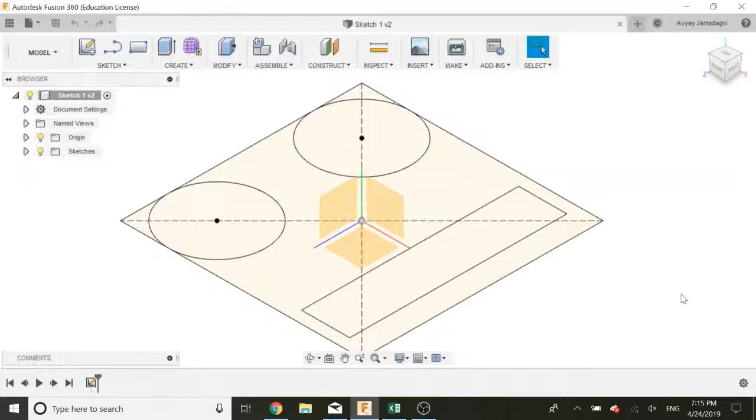So what is extruding? Extruding is basically a fancy term for taking a 2D sketch, or a face, and making it 3D. That's exactly what we're going to be doing with our sketch that we created in lesson 3.

Now let's zoom out a little and pan so this comes to the center of our screen. The first thing I want to do is get rid of this origin because it kind of obstructs our view a little. It doesn't matter too much, and if you want, you could keep it, but I prefer not to have it.

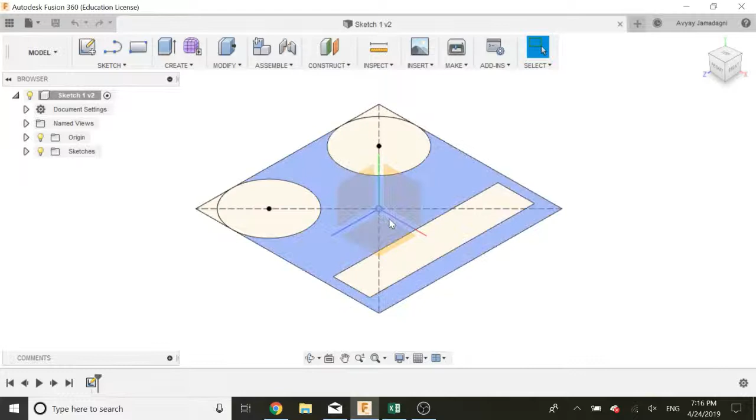To remove this origin, or just to hide it, you need to manipulate this tiny little light bulb over here. Just click on the bulb and that turns it off. So the origin is gone.

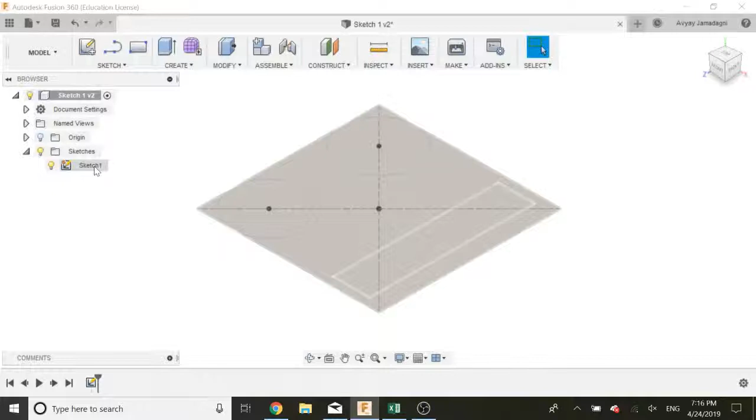Now the same thing you can do with your sketches. This is the first sketch we've created. To confirm this, you can see one sketch down in our design history. If you click on this tiny arrow, you see there's sketch 1. If I click on this, it highlights this entire thing, and that shows that yes, we have one sketch. Let's click on this again.

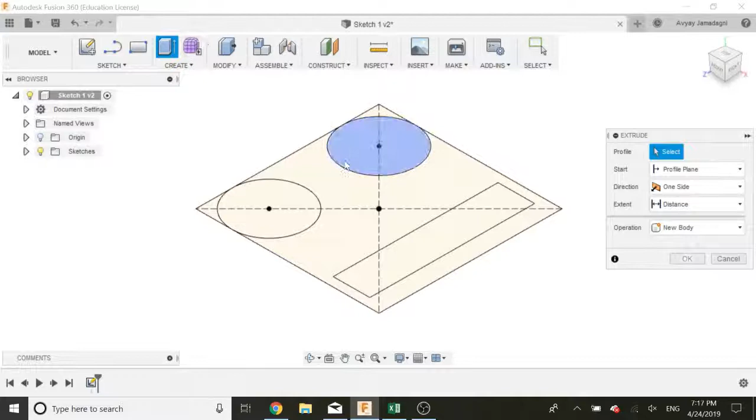Now we will be turning this sketch on and off throughout this video. First, I want to extrude this entire thing 10 centimeters upwards and 10 centimeters downwards. To do this, I'm going to click extrude, either by hitting create and then clicking on extrude, or I could hit E on my keyboard, as you learned last time, as it's the keyboard shortcut for the extrude option. Now I get this pop-up window.

Since I need 10 centimeters both upwards and downwards, I'm going to choose something called the symmetric option. So we'll go to direction, click on this drop-down arrow, and let's choose symmetric.

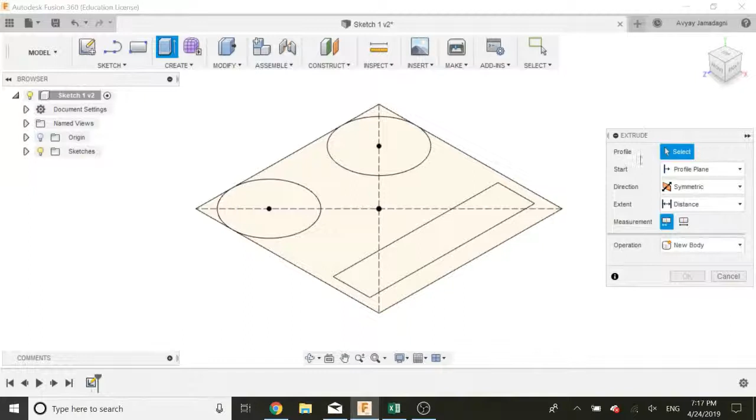Now it says extent is distance, and I still need to select the profile. The profile is basically what you want to extrude. To do that, let's zoom out a little. Instead of selecting each of these shapes individually, I'll select them using a box. I can just drag out a box over the entire thing, and that selects all the shapes.

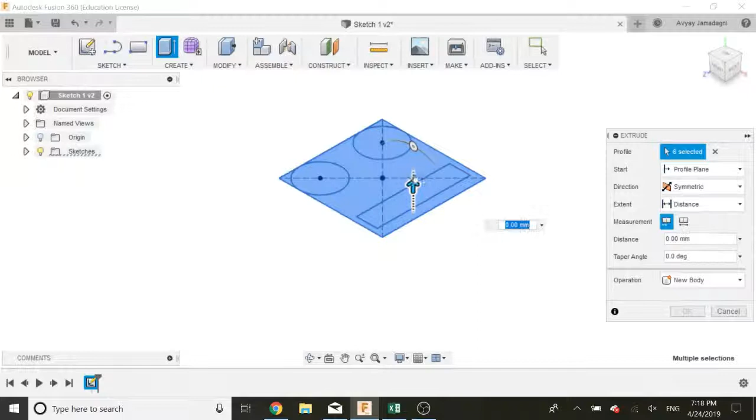You can see I can manipulate this by using this arrow, and however much I move it upwards, it moves the same distance downwards, which is exactly what I want.

So let's change this. Some tips on extruding first: you might want to move the arrow up and down just to make sure you know which way you're extruding, because you can extrude upwards or downwards depending on the arrow. If you're extruding in the opposite direction of the arrow, you need to put in negative numbers.

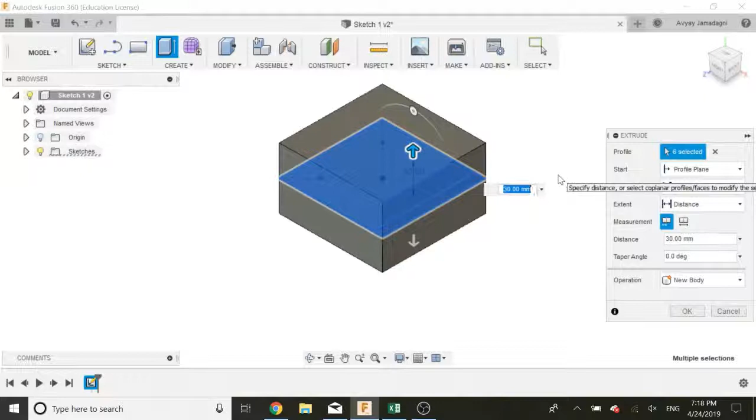But since we need to go in the direction of the arrow here, let's put in a positive number — we want 10 centimeters. Let's type in 10 centimeters and hit enter, and that's what's going to happen. So you see that now we basically have a cuboid.

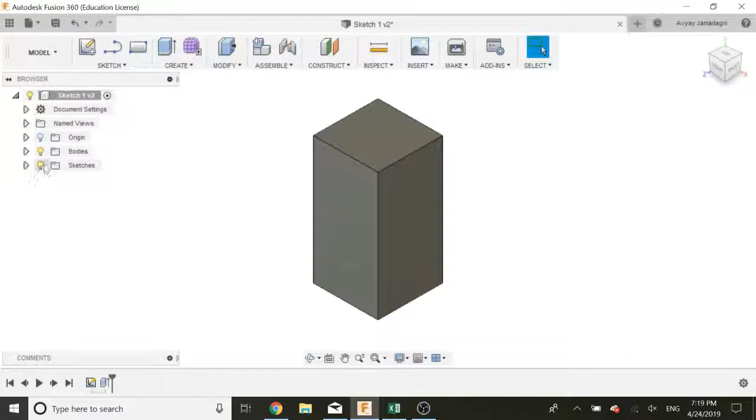Now, something Fusion 360 does that's kind of annoying: whenever you use a sketch to extrude, it automatically hides it. So let's try to show that sketch again — we click on this arrow and then click on this light bulb, and that brings back the sketch. Let's close this sketch bar by clicking on the arrow again. Now let's try to manipulate these and see what we can do.

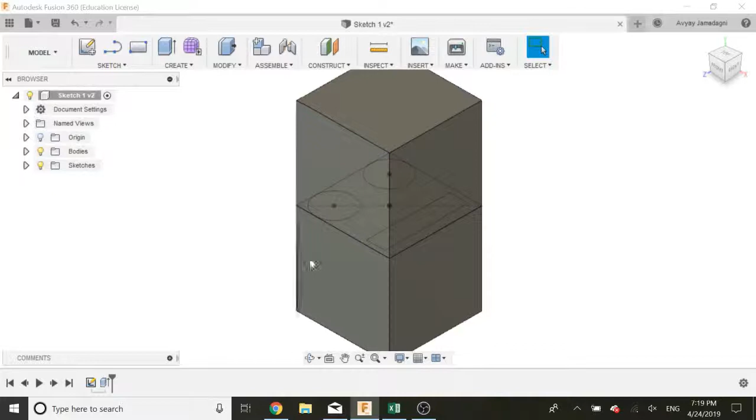First we need to create a hole on this area using this circle over here. To do that, we need to select this circle, but we can't do it with this body in the middle. So we're going to hide this body by clicking on this light bulb, and then we'll select the circle, hit extrude.

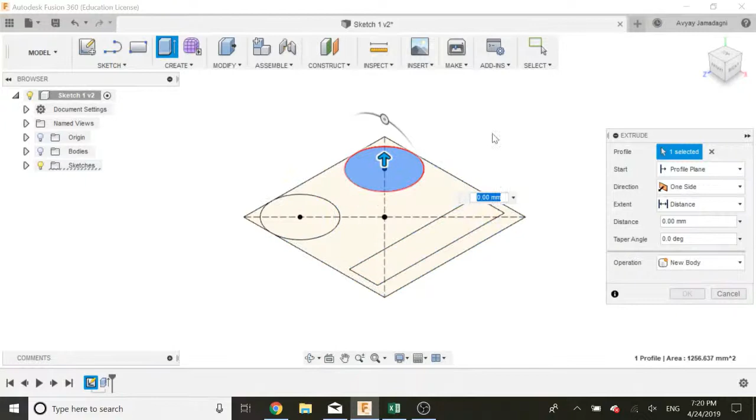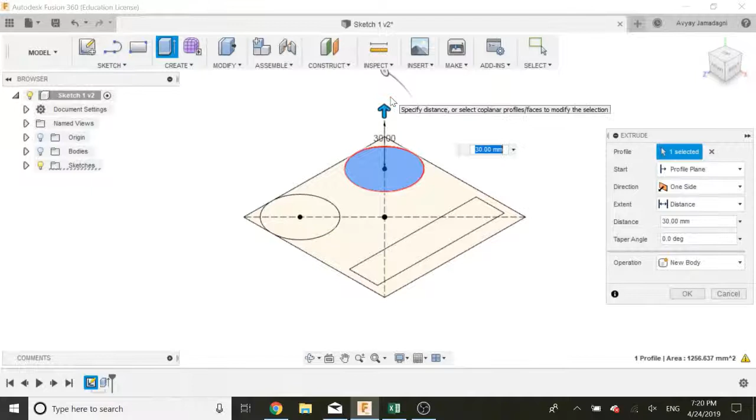It doesn't matter whether you hit extrude first and then select the circle, or select the circle and then hit extrude. Let's test out which way this goes. We're trying to extrude something, but we can't see it, as shown by the warning here: the object you are creating is not visible, please toggle visibility in the browser. Basically this means that although we're extruding something, there's a solid body around it, so whatever we extrude won't be visible. Let's unhide the body again and see the result.

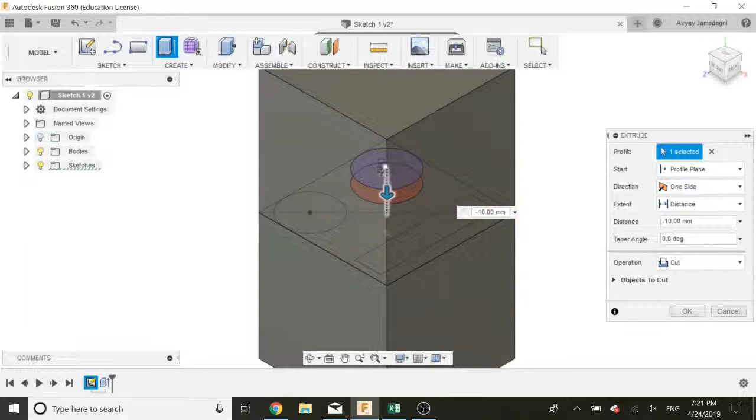Now you can see that we're extruding inside. But we're also doing one more thing: whenever you see this red shade where you're extruding, that object is being cut, so you're literally making a hole inside the cuboid right now. What we want to do is create a hole that goes throughout the entire cuboid. To do that, let's go to direction and click on symmetric, and test out which way it's going. That's good.

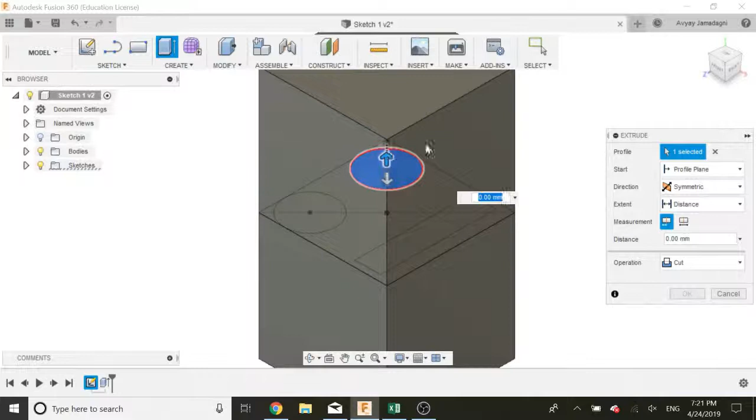We could type in 10 centimeters here, which will create a hole that goes directly to the top, creating a hole throughout the entire cuboid. But an easier and more professional way of doing it is, instead of selecting extent distance, we select to object. Usually with the symmetry option, to object is invisible.

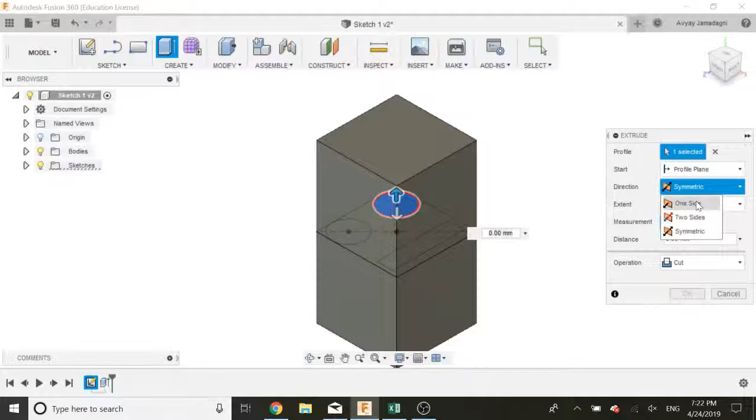So let's go back to the one side option in direction, and now let's go to extent and select to object. This selection icon is now present here, so let's go ahead and select this top face. Now you can see it creates a hole all the way to the top. However, it does not create a hole all the way to the bottom, and that doesn't make sense for us.

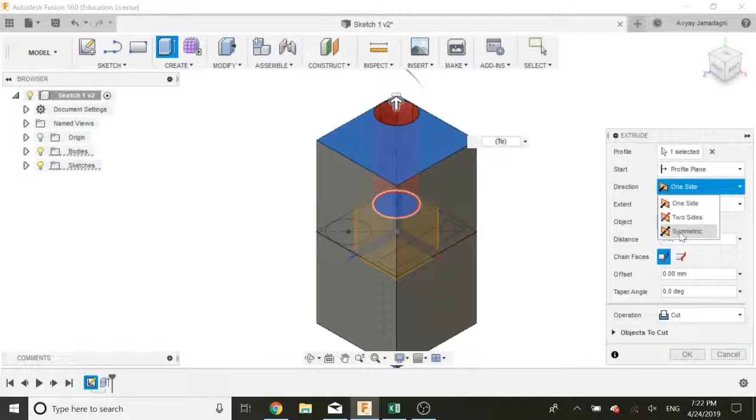So what we're going to do is go to direction and select symmetrical. Now you see there's a huge hole that goes all the way through the cuboid. Let's make sure the operation is cut, make sure this is shaded red, and go ahead and press OK.

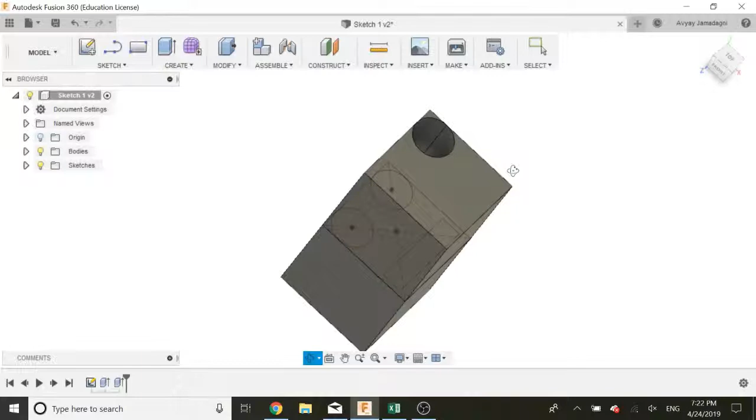Let that compute, and now you see there is a hole all the way through this. The advantage of using to object instead of direction and typing in 10 centimeters is that now if I manipulate this, or go back in my design history and manipulate the first extrude we did, whatever I do to it, whether I make it smaller or bigger, this hole will always be present. Sometimes if I mention only 10 centimeters and decide to extend this further up, the hole here will stay at 10 centimeters, and the hole throughout the entire cuboid will not remain.

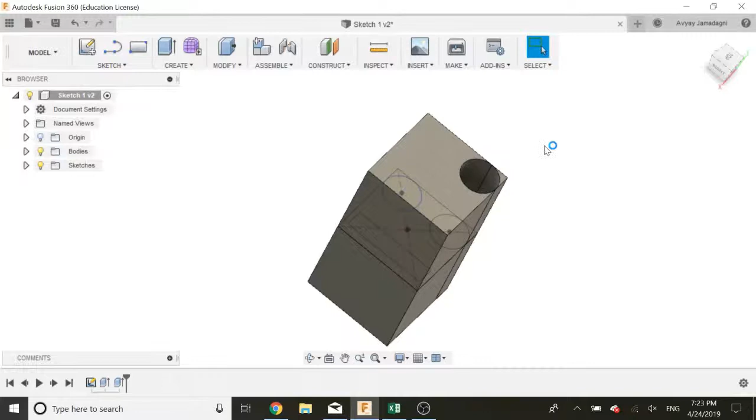Now let's go ahead and make one more small hole using this circle this time. Since we can't select the circle as it is, let's hide the body, select the circle, and then click on extrude. Now let's unhide the body again.

This time let's use a different feature. In the direction, instead of giving one side, let's give two sides, and let's manipulate this. You know the blue arrow is going upwards and the white arrow is moving downwards - that's side 1 and side 2. The blue arrow is the one you select, and this tends to move upwards, so that's manipulating side 1.

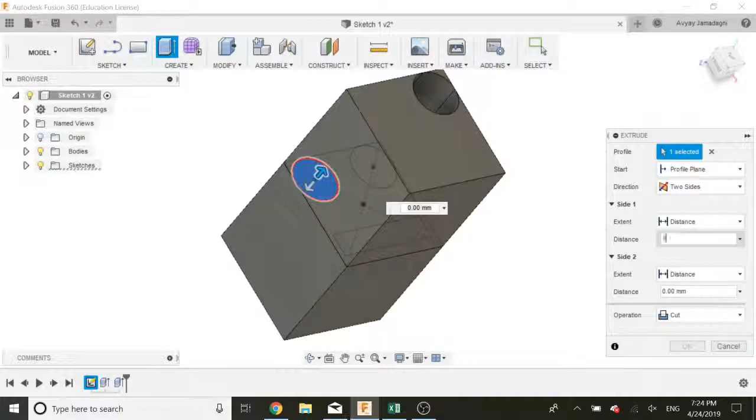We want the distance for side 1 to be 10 centimeters, or just to be a hole on the top. There are two ways to do this: either select that and type in 10 centimeters, or click on the top face and that'll automatically bring it to 10 centimeters. However, this is not the same as doing it by to object - if you extend this further, this hole won't exist anymore, so you need to be careful with that.

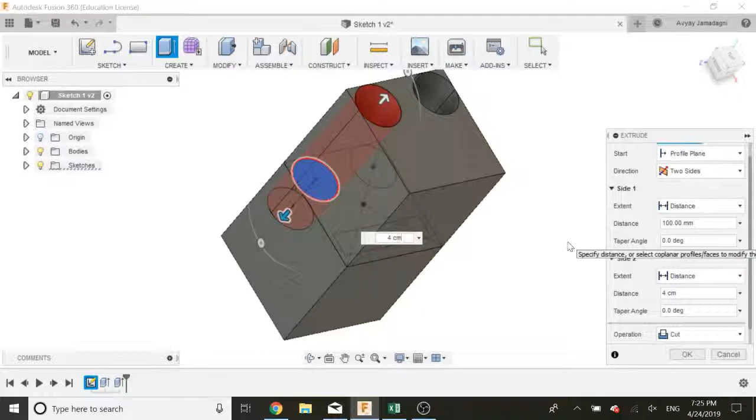Now for side 2, we want it to go down 4 centimeters. However, since the direction is already downwards, we don't need to put that negative sign. So we'll just type in 40 millimeters, or 4 centimeters, and that creates the hole on the bottom here. Let's go ahead and click enter.

Now you see, if you orbit around, there is a hole all the way down there, so that the total distance, the depth of that hole is 14 centimeters.

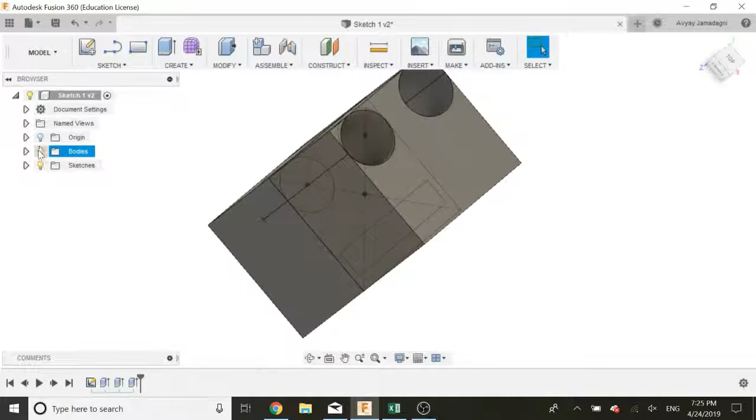And now one last extrude we want to do. For that, let's go ahead and hide the body again, and let's manipulate this rectangle over here. So let's select the rectangle, go to extrude, and let's unhide the body.

Now, what we want to do is extrude this upwards 12 centimeters. So let's fiddle around with the arrow to see which way we're going. It says we're going up. So let's go to the distance and type in 12 centimeters.

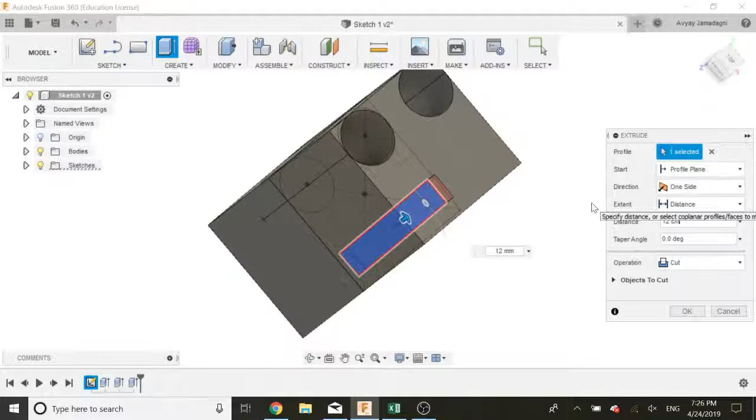Now, before we hit enter, this is still showing red, and we don't want this to cut through the entire object. We actually want it to protrude on the outside. To do that, let's go to the operation down here and click join. Now you can see that it actually protrudes, and this is exactly what we need.

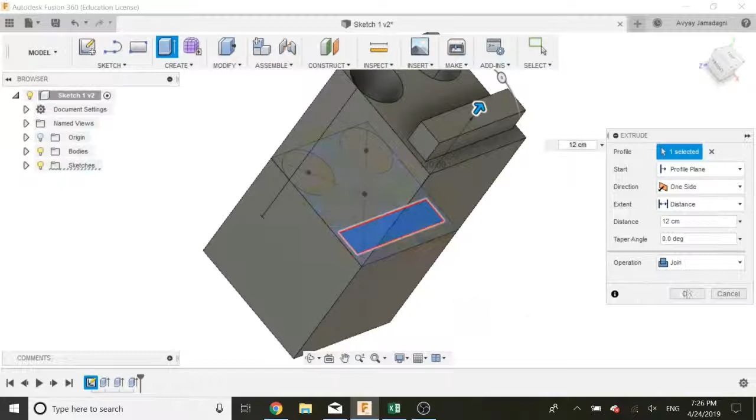Now let's go ahead and click OK or hit enter. And this is exactly what we need. So this should be the final shape you would end up with.

Now, something you might want to fiddle around with, just to be on the safer side, you see that there are two separate faces over here. We generally don't want two separate faces. So what we're going to do is select these two faces and extrude them outwards.

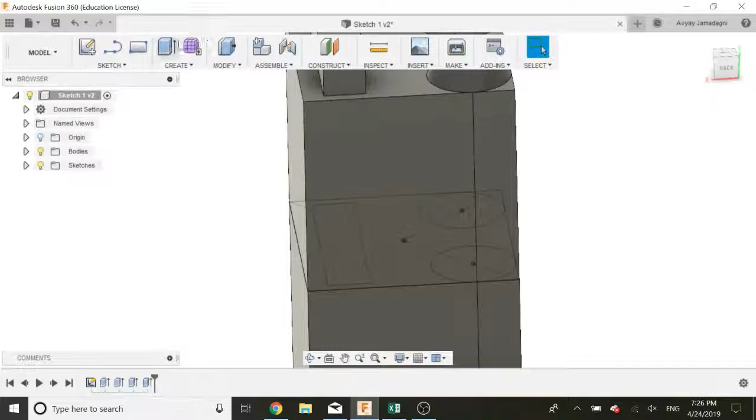So let's go to extrude and select this face and this face. And let's just do 1 millimeter. So let's type in 1 mm. Since Fusion 360 automatically does this in millimeters, you don't need to type in the units now.

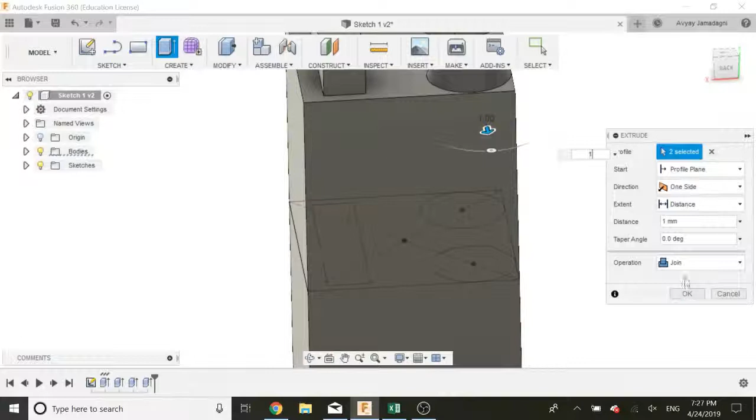However, if you're doing centimeters or inches or feet, then you'll definitely need to type it in, or you'll need to go to your preferences, which is up here again, and edit that. Let's go ahead and click OK. Make sure that the operation is join. And now you see that it's one entire face.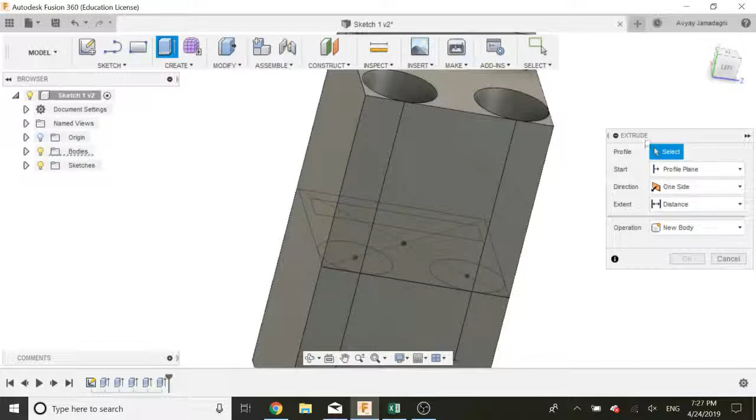Let's go ahead to this side and do the same thing. So let's try the keyboard shortcut instead of going to create and hitting extrude. Let's hit E on your keyboard, and that should open extrude. Select this face and this face, and let's type in 1 millimeter again. Hit enter.

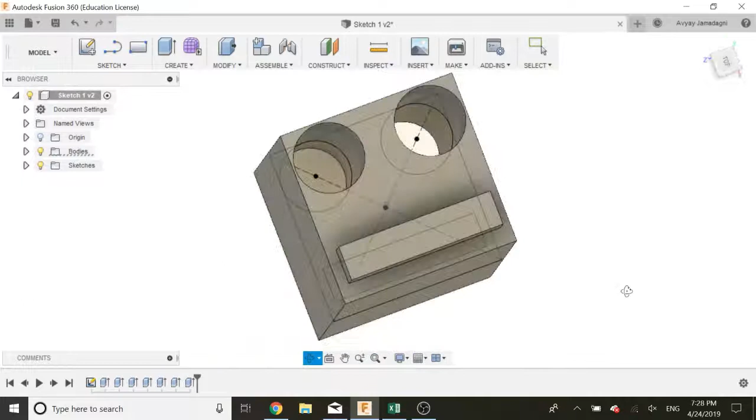And now you have that line gone as well. You have one more line here, so you know what to do. Hit E on your keyboard, select that face, hit 1, and press enter. And that's it. Now the shape has been edited slightly, but you see that there are no lines anymore, and you can see that it's looking good.

So it's looking pretty professional. Now, just for the aesthetics of this very look, let's try to hide the sketches and make sure it's one entire cuboid like this. Now, you see that in your design history, you have a total of 7 extrudes and 1 sketch.

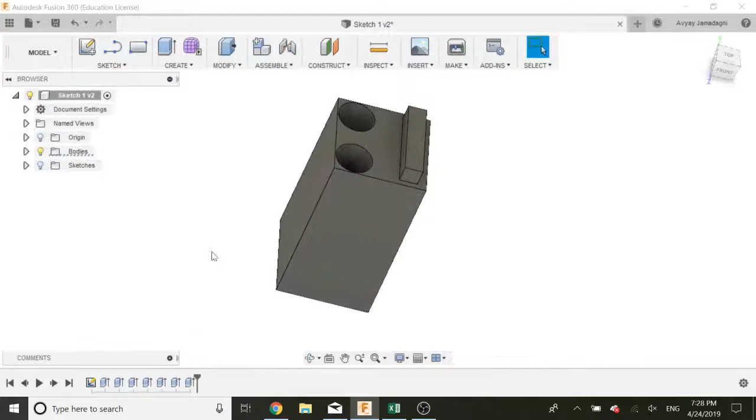It is looking kind of messy over here, and that's going to be the focus of the next video, how to clean up your design history and how we can take this shape to the next level. How to make it more perfect, how to add fillets, and stuff like that. Those will be the aims and agendas of the upcoming videos. Thank you so much for your time.

It says version description is user saved. Let's go ahead and press OK. And now you see Sketch 1 version 2. Let's go to the data panel. And it still says Sketch 1. However, well, it's not exactly a sketch anymore, is it?

So let's rename that. Let's click the right mouse button and go to rename. Let's call this Product 1. And hit enter. That's going to save that, and it's going to save it as version 3.

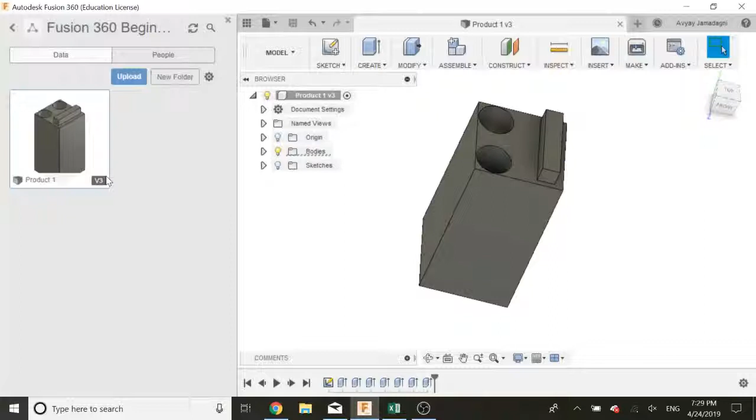Now, that's perfectly fine. As you keep on saving it, it saves as different versions, and I will tell you the importance of that in future lessons. Anyway, let's hide the data panel for now, and this marks the end of this lesson.